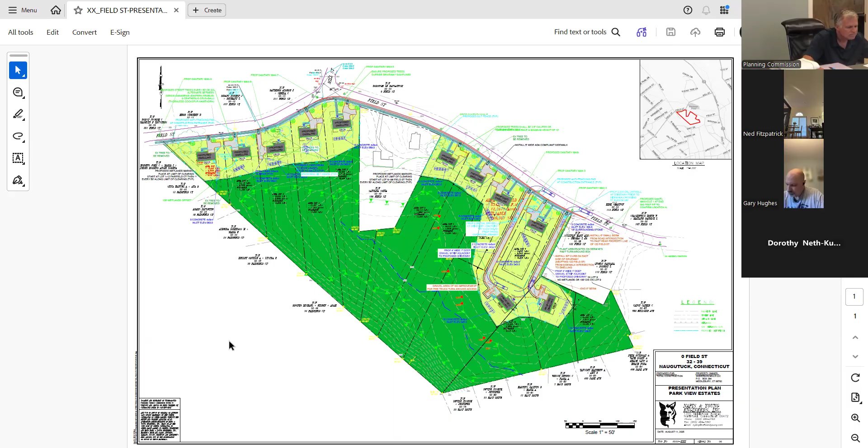It will show you the magnitude of the water, and how it comes onto my property. It kind of hits my foundation, runs around the back of the house, and then goes over onto my driveway, which has an asphalt curb that was put there purposely. So when it hits the driveway, it hits that curb and then runs back out to the road, and then it races down the rest of Field Street.

Which one do you want? That one. How about the bottom one? You got that little one. When that was taken, I don't know the exact date, but within the last year and a half.

Was it that way today with the heavy rains? Oh, this was due to everything. But today it wasn't that bad, not this bad, in the woods where it originates. I only drove by twice today, at 10 and 3, and neither time was there any water on your property. Yeah, it's still sitting in that low area, and you can't see into there now because it's so green. I took some pictures today because it does fill up again. If it rained for a day or so more like that, it would start to overfill onto the property.

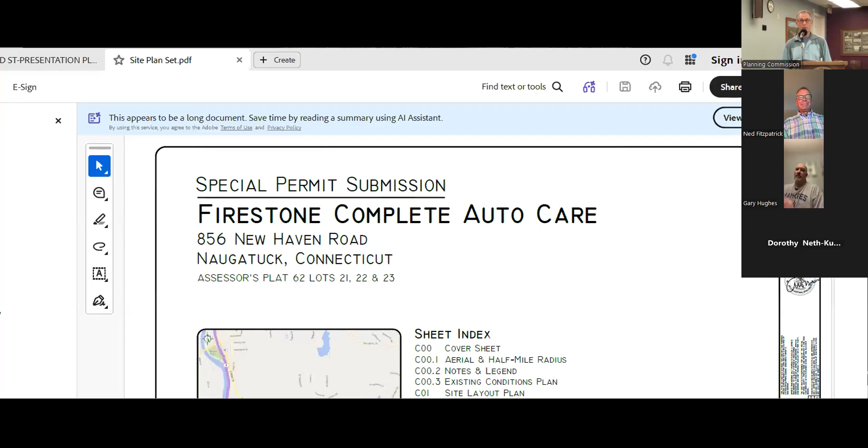We think we're going to add about 8 to 12 employees, and we think the application meets the requirements of Plan of Conservation and Development. When you go through it, you think about what you guys were thinking about when you wrote it, and specifically for New Haven Road, it was very prescient of all of you. I think you did a nice job.

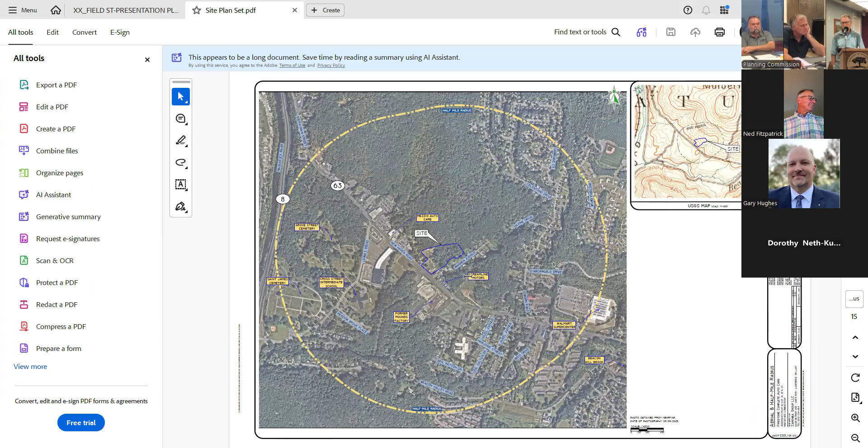Place development on page 3, where there is existing water, sewer, roads, and infrastructure before expanding infrastructure. So New Haven Road being a great spot, we think this is a great spot for us to place our building. Place priority on reuse of previously developed sites. This site is currently owned by Dean Rotatori, who has an auto car business there. In fact, the last car my father bought, we got through Dean back a while ago. Cars and vehicles were sold there, and repairs were done in the back on another parcel just next to it. Then we have the larger sites along New Haven Road that we expect to have filler sites like this fill out.

We think right away of Peter Paul, that's a huge site, but these smaller sites get filled up with nice businesses.

Now, the Firestone business: Zaremba Group is going to build the property, and Firestone is going to be their tenant. Firestone has 950 locations across the country. They employ thousands of technicians, and they're an organization—when you go by their buildings that my client builds, they're beautiful. I went by the one up in Glastonbury, it fits in, does a nice job, and all the work is done inside the building, typical of a car repair place. You park your car outside, they bring it in, get the work done, and you're on your way.

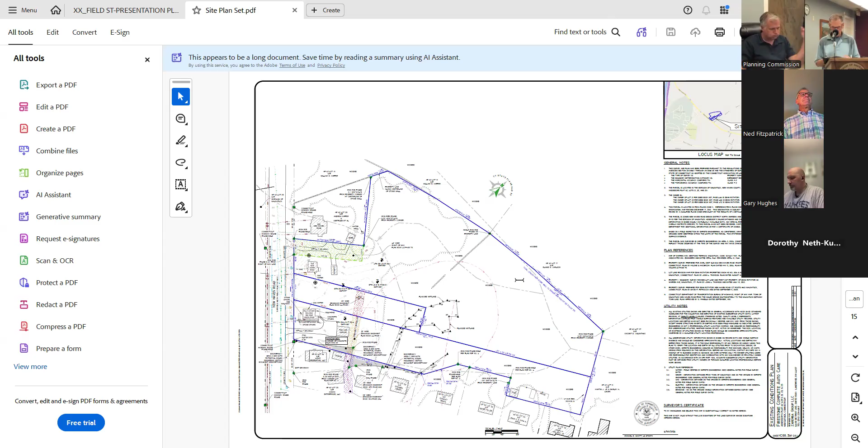Plan of Conservation and Development also talks about treating that area down there as a tax district. We're trying to increase any kind of business in our area, and I think we have a strategy of how the tax financing districts work and make things happen.

Part of this is to encourage sustainable economic growth and foster new jobs, which this business does, and recruit new businesses. There's another new business coming in. I think all in all, the project adds jobs and does the things that plan of conservation calls for. When we talk about the plan, Joe's going to address some of those issues. You'll find that the project works really well. It's excellently designed, and to be honest with you, I've never had so much engineering information when an application arrived. It's got everything in there, from traffic studies to stormwater management and design. So I'll turn it over to Joe, and I'll be here for questions.

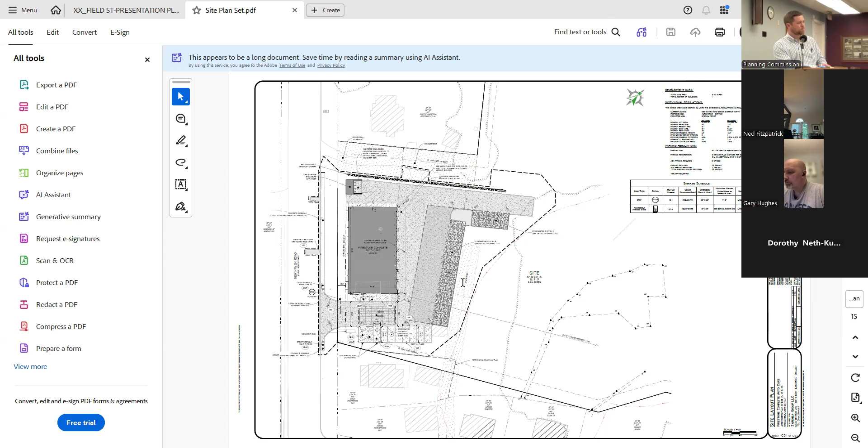The site was developed using Bridgestone's typical building, partially changed to an 8-bay unit system. The overhead doors will face inwards to the site. We're going to have access off New Haven Road for a drive aisle into the site, with parking along the south side and the northeast side of the page, and access from the bottom. The main point of entry for the building is along that face.

The site proposes concrete pavement grout in the parking space areas, which will serve as a water quality and stormwater treatment area of pervious concrete. It also has an underground infiltration system within the drive aisle as you enter the site.

It provides 29 parking spaces, compliant with the loading zone, with access in front of the door entrance.

As far as truck circulation, fire truck circulation, the entrance has been developed for the truck turn movement to come into the site either way and enter the back of the property. There's a long drive aisle on the back, fully purposed for a truck to come in to where the enclosed dumpster is and unload goods from trucks servicing the building. Likewise, for a fire truck to make a 3-point turn, come into the site, and then exit out.

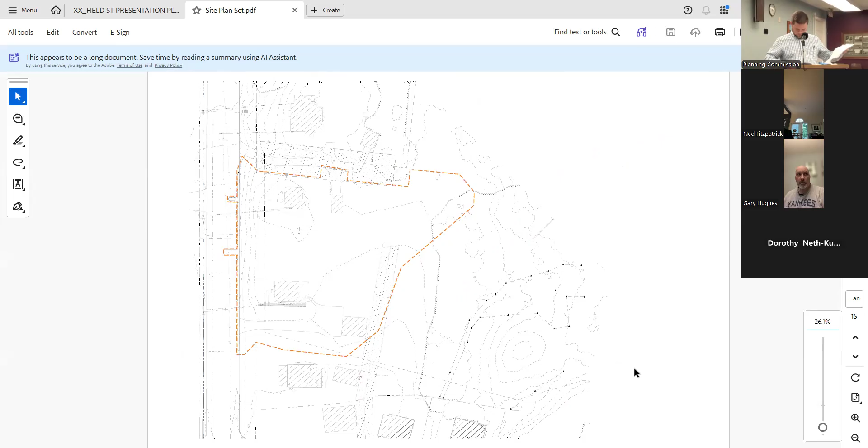Part of the project plan, looking at the stormwater and grading sheet: to touch upon site stormwater, the intention for the project is to have the roof runoff from the building itself captured by underground leaders into an underground storm tech chamber system within the driveway, which will have pre-treatment and maintenance cleanouts for long-term and short-term maintenance.

For the majority of the site, the stormwater and grading will sheet flow to the parking field on the right-hand side of the page. That area, outlined in purple, is the storm system, the parking pervious concrete panels, as they're called. You can see this on some of the sheet details. There are precast 4 by 5 foot panels that infiltrate stormwater into the substrate to a gravel reservoir area, which is delineated by that purple hatch.

Both systems have been designed for the 100-year storm event, to mitigate a 100-year storm event and provide water quality treatment. What's also very important about this project is that we've flagged the on-site wetland, delineated on the right-hand side. The edge of disturbance in the work is along the edge of the 100-foot upland review area, and there would be no temporary or permanent disturbance within that upland review area. That was a critical item of the project. We didn't want to disturb any of the upland or any of those environmentally sensitive areas.

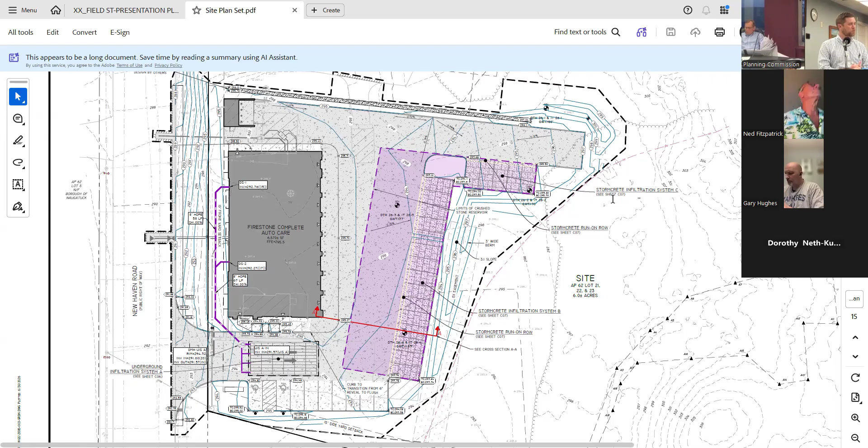Yes, as part of the work we will be removing two houses that are there today. I believe they are residential apartments.

As part of the project plan, we've provided a landscape plan that has landscaping all along the edges of the parking field in front of the building, so you have that aesthetic from New Haven Road.

Any other questions? If there are any questions, we have Justin Bruce, the applicant, online for operational or any basic information. Yeah, I have a question.

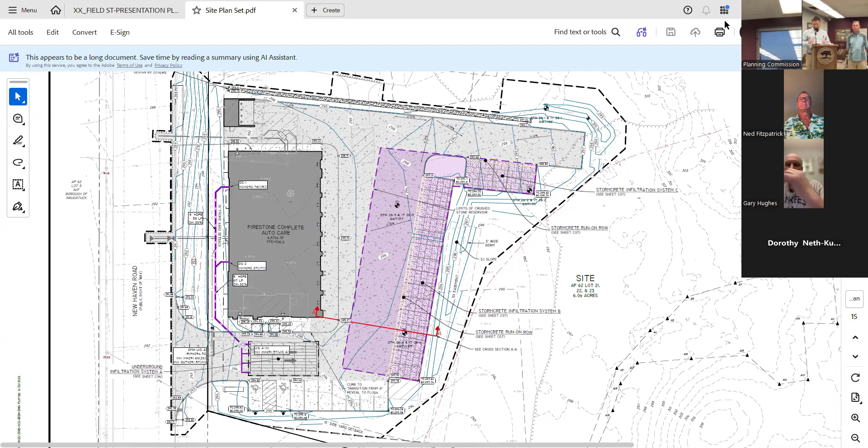Sheet 3, all the way to the right. What's the name of the page? Name of the page is existing conditions. All the way to the right at the bottom - yes, the Lewis and Regina Dean house.

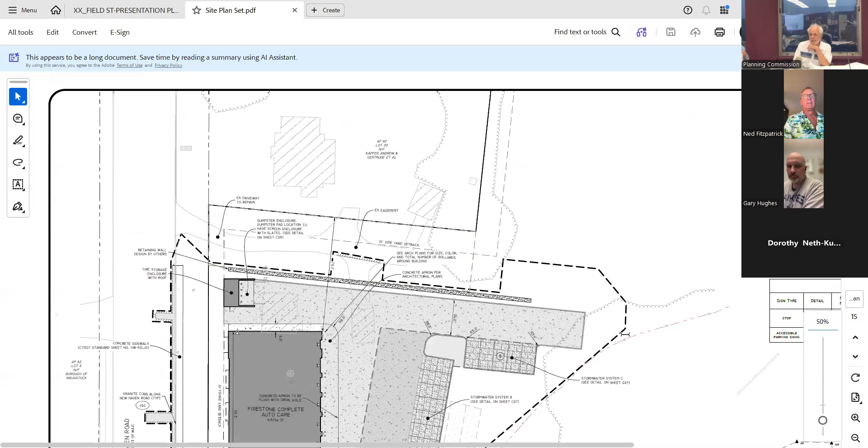It appears to have a fence, shed, and a whole bunch of stuff on your property. That's correct. As part of the survey, we've found what we'll call encroachment of the shed and fence. The applicant Justin is currently working with them to look at and review that.

There's a number of rights-of-way and easements on the property, and as part of this project we're just staying out of them. It doesn't affect what you're doing, but it could be a problem. What we're proposing won't be affected by existing easements or any of that.

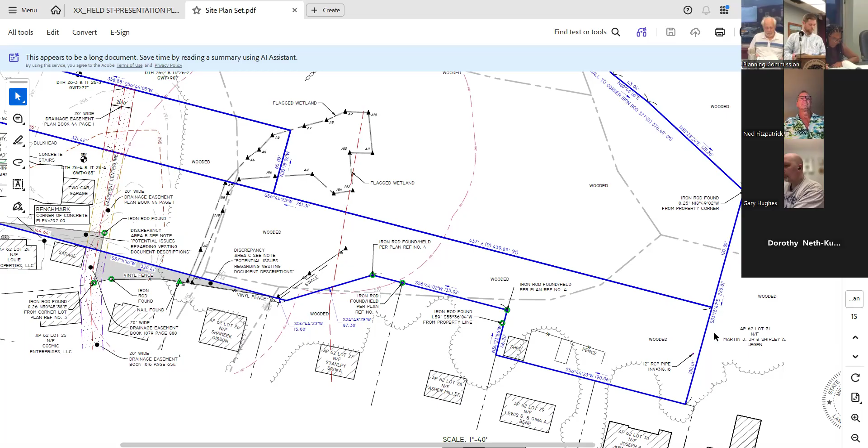I don't know if you've mentioned, but we will be consolidating the lots into one. Part of our application is to merge the property all into one big lot. So the middle sliver piece, which is tiny, will join the two larger pieces, and we'll have a full 6.04 acres once we take title.

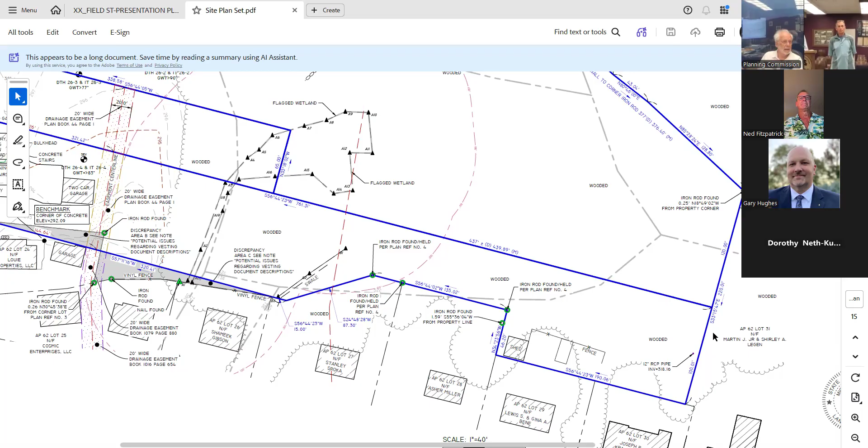Any other questions? Gary? I'm not good at Zoom. No, I'm good, thank you. Justin Bruce, if you wanted to touch on anything, let him. Which we got - Jay Bruce. Yes.

Thank you, can you guys hear me? Yes, one second. Hey, how about now? They can hear me, it's echoey. Justin, you want to - all right, here. Sorry, I had to take it off my phone. I'm sorry, I was having issues with my speaker, my computer when we started the meeting. Fortunately I have you guys muted right now, but it looks like you guys can hear me. Sorry about that. Yeah, we're the applicant, we're Zaremba Group.

We are a developer out of Cleveland, Ohio, and we are Bridgestone's preferred developer. We have the land under contract to purchase from Dean and Paul Rotatori, working with both of them as we move forward through here, and Bridgestone would be our tenant. Joe and Kevin did a great job explaining our project to you guys, so I won't go into any of the details on that.

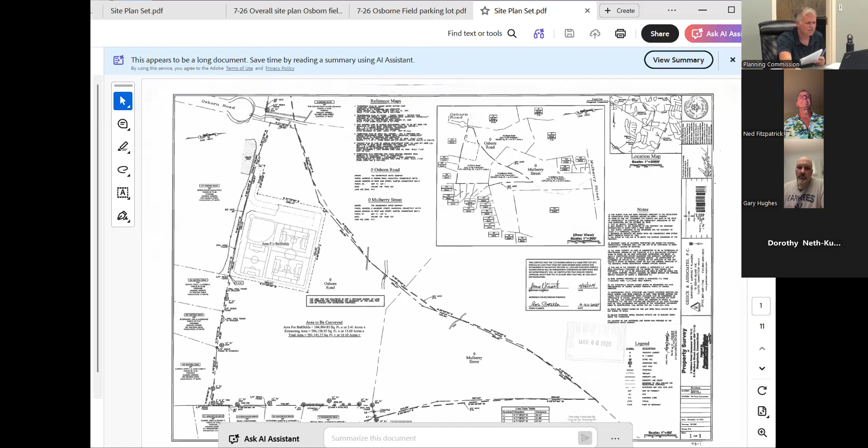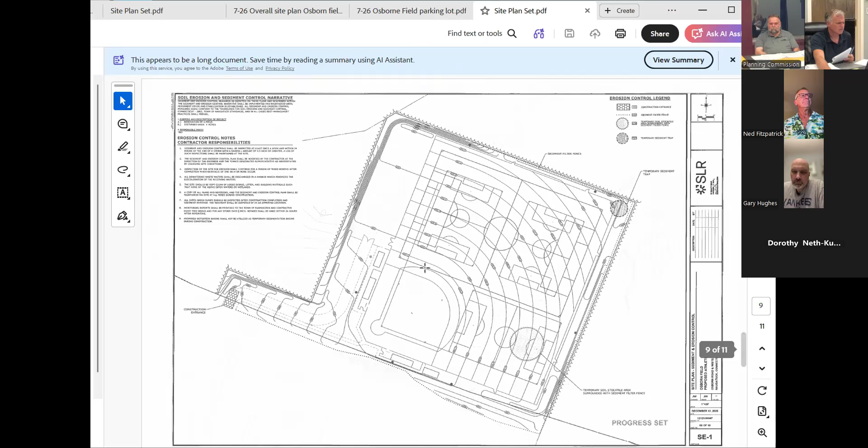Okay, so there's the 16-acre parcel we acquired from the water company. There's the entire parcel with the grading of the field area. Okay, so there's the grading of the finished field. Let me see if I can get you what we're going to talk about.

Okay, so it would be fenced. There's swales around the side to collect stormwater. And then there would be this gravel driveway up to a flat and level area. We're calling it an overflow parking area, but it's probably going to be for coaches and equipment to be brought up there.

And we're proposing 2 dugouts, and there's an area for grandstands for people to watch both games. Since it's elevated, they can watch the existing field as well.

Property is in R65 zone. We talked about that, talked about there will be bedrock exposed, fairly significant work involved. There'll definitely be significant blasting to level the field. But we're planning on being mostly a balanced site, except for the materials we've got to put in to make the actual field itself - topsoil, clay and such - but we aren't gonna need to bring in fill to build the park.

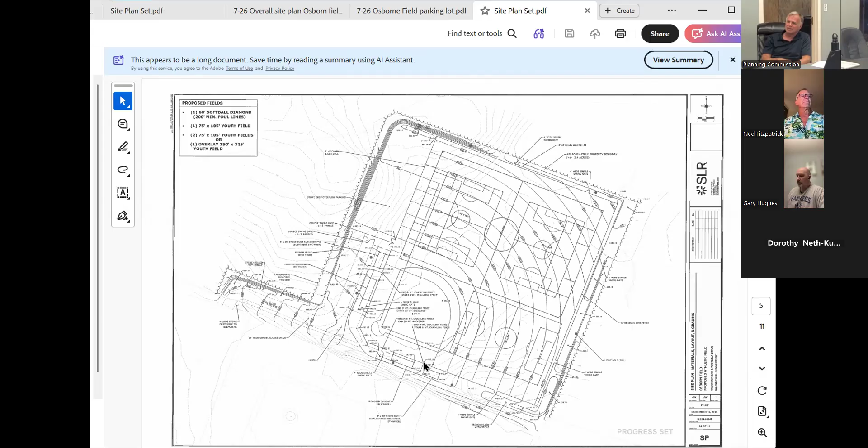Is there a net between the existing field and the proposed fields? Or are people on the new field going to have foul balls land on them? That's an excellent question. Well, the answer is... I'm not a big baseball person, so I'm gonna have to ask that question. I'm gonna have to look at where - well, let me look, hold on.

From the angle of the field, it only needs a big backstop because anybody facing home plate would be looking at the other field, so they could see pop flies coming over the top. It's the batter and the umpire that would be subjected to getting hit. Let's look.

So I would assume with the backstop in this location, a foul ball might go over. The people in the bleachers that are located in this area may have a problem, but they should be watching the game like you're at a baseball game, right? Isn't that what it's done? Don't you sit there and watch it because you're gonna get hit in the head with a ball if you're not? If you're watching the right game, yeah.

I should have asked this question first. When we acquired the property from the water company, I know there were restrictions on its use. Is this in violation of any covenants with the property we acquired from them? This field? No, that property was acquired with this 16-acre piece, particularly to put a field in.

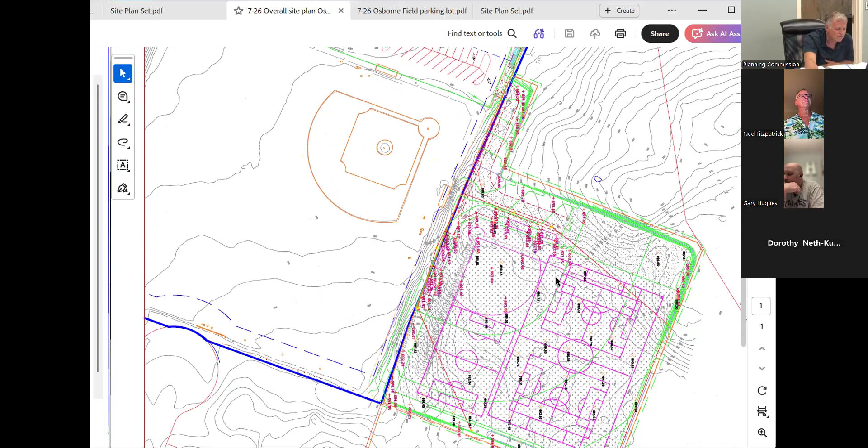For the youth side soccer team—has this been run by the organization that runs soccer in town, or is this just to make it artistically pleasing? This was artistically pleasing in my opinion. We generally don't normally do this; it's such a small area. I don't think, and you're correct, that the parking is probably not enough to do this layout.

Normally we would do one field either in this direction or in this direction if we're gonna use it for soccer. Once the kids get to be 9 years old, minimum of 11 players on each side, that's 22, it couldn't coexist with that parking. And now you don't want to sit around and watch them anyway, you drop them off and drive away.

So, I'm sorry. Knowing what else is being proposed in town, I am not inclined to look negatively upon additional fields.

Foul balls are gonna get in here. And it's fine if it's perfect, it is, but—kind of fond of my grandchildren—so that no physical barrier to prevent that is a drawback. But I'm not gonna argue about additional features.

Well, I certainly will bring that up with the staff that's more baseball inclined than I am. Jim, is that something that we're gonna build, or are we gonna bring in a company that builds baseball fields?

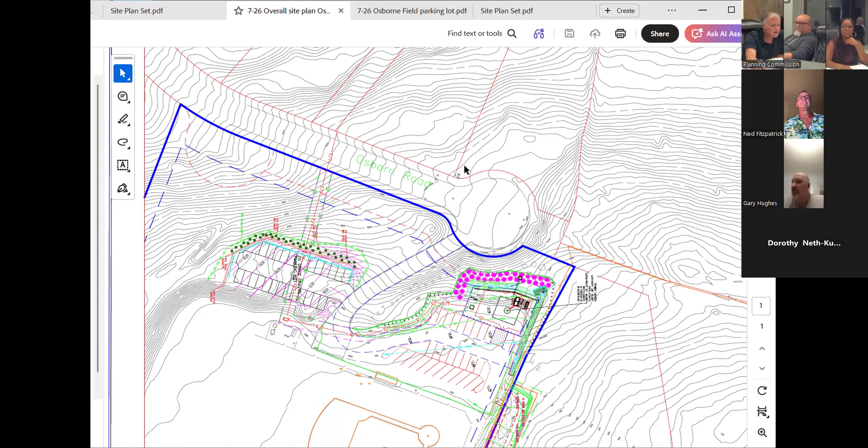Well, we have a grant from the state for $1.8 million. Our plan is, and we have plans set up to clear the area, set up the seasonal erosion control, and blast and grade to a flat site—well, a pitched flat site, flatter than it is now, since fields are pitched.

The borough would then subcontract the rest of the field. Like we did with the other field, we would hire the company that does the lighting directly, so we're not paying the markup. We'd probably grade the topsoil and hire the guy that runs the grader, then hire individually the irrigation guy, probably build the interior field, hire the fence guy to put the fencing in, and the lighting. Rather than paying one person to piecemeal it all up, marking up everything by 20-30%.

I'm looking for that baseball field architect that's just gonna say, yeah, we need to put this net up here so the fields don't trade balls. But I don't think that's gonna be up to us. SLR designed the fields, and I can certainly ask them what their opinion is about netting. I think that's a great point.

I don't want to have the same problem we had with the parking lot. Yeah, and if home runs look into where the cars are, the windows...

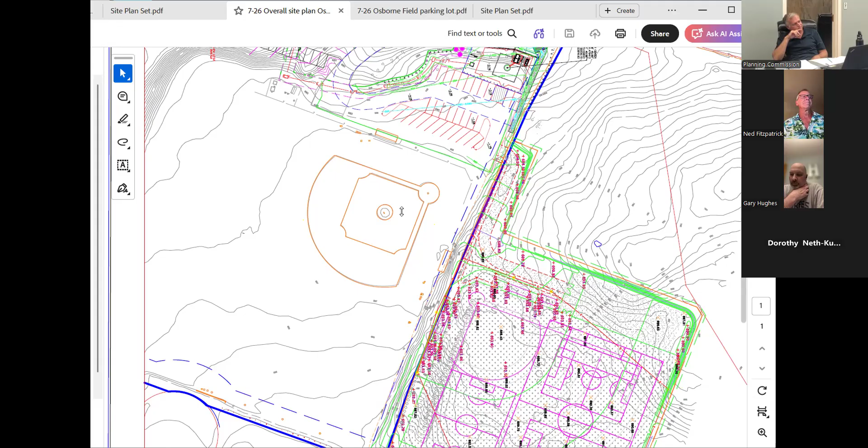Have two telephone poles with a net between them. Really? Yeah, their telephone, 50-foot telephone poles with a net. I don't know that—a prop to keep them off the highway. Off the highway, well, that's a little bit of a problem.

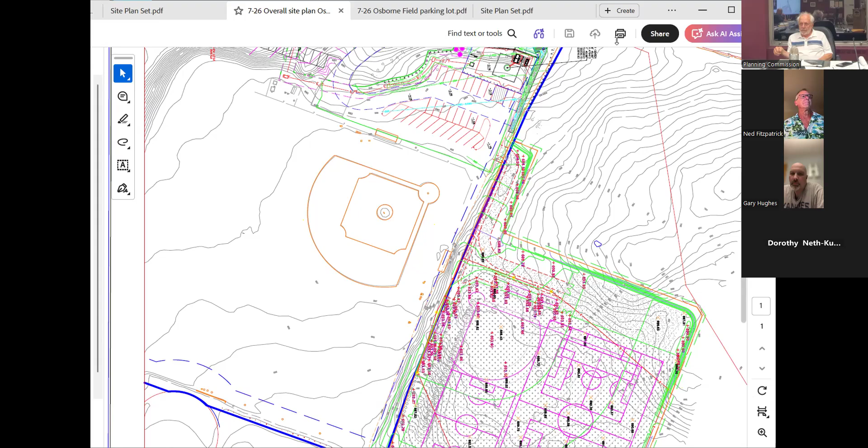Somehow when I think of Naugatuck, a parking problem just comes up. I'd make that parking lot as large as I reasonably could without creating 14-foot retaining walls. Exactly, at that point you'd want to put another one down on the lower level.

But if you did go with a 14-foot wall, we could call it the Great Wall of Story. We could also let people graffiti it. I think that's a great idea. You can bring that up with the pro board. Please don't say that.

A retaining wall mural, sports themed, would be an excellent idea. Well, I need to know before we actually pick the wall—if we want stone facing, I don't know if the mural's going to work.

Are there any more serious comments? Hearing none, I'm entertaining a motion to send the positive referral to the zoning commission for the construction of a ball field for the property located at 257 Osborne Road, Osborne Field Complex, in the Borough of Naugatuck. Is there a second? I'll second it. Any further comments? All those in favor, signify by saying aye.